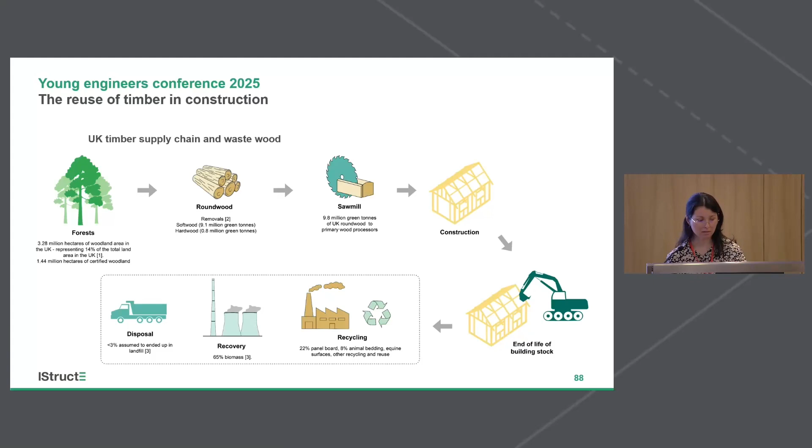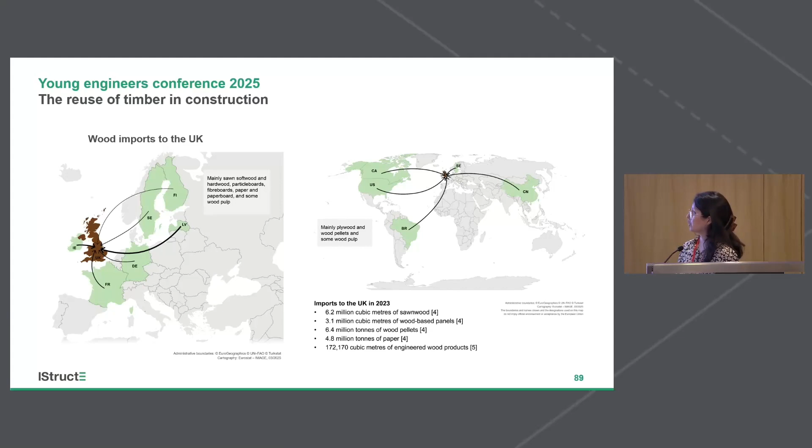So we can see that the UK has a very linear model regarding timber and construction. On top of that, the UK is the second largest importer globally of timber products. We import products from Europe but also globally—all different sorts of products because we don't have much of our own to use.

So here we have the waste hierarchy—the inverted pyramid from the Waste Framework Directive, according to the EU. Similarly to the pyramid we just saw, the first thing we want to do is prevent any demolition, probably. The second is reuse, then recycling, recovery, and disposal.

But the point we wanted to make here before starting the project was basically the fact that recycling can go two ways. We can either recycle something and produce a product with lower value, or we can recycle something to produce a new product that potentially has higher value.

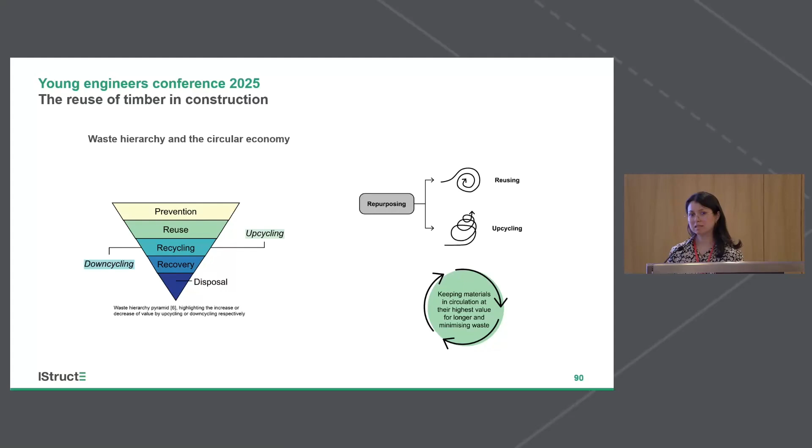By higher value, I mean new products that can potentially replace high energy intensive materials like steel or concrete. So what we wanted to understand in the research was how we can repurpose—either reuse or upcycle—the wood that comes from demolition to keep these wood materials in circulation for as long as possible.

The key objective of this research, what we actually did, was conduct a series of interviews with different stakeholders in the construction sector to understand the barriers and opportunities, to have a clear idea from the demolition side, but also from the construction side—the barriers and opportunities for reclaiming wood on one side, and reusing wood on the other.

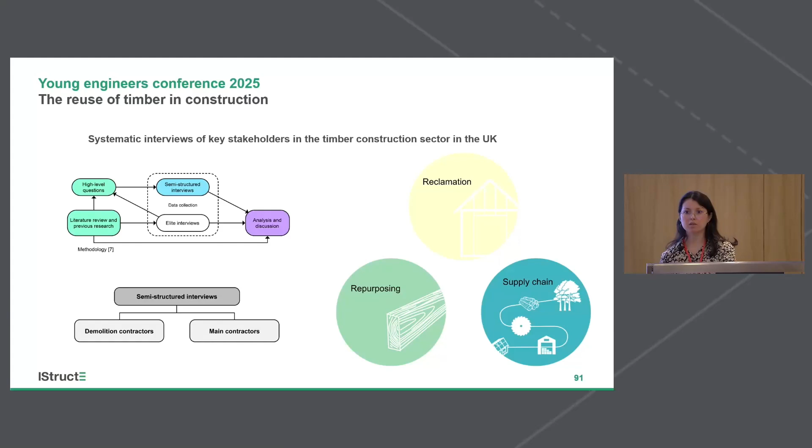In terms of the barriers we got from the responses: the barriers for reclamation are mostly the increase in time for the careful deconstruction of wood from existing buildings. Therefore, also increasing cost, more logistics because they need to find a space to store the material in situ, but also find someone willing to take the material away and pay for it or not.

And then demolition methods and skill set, because they highlighted that different skill sets might be required that are different from those of demolition, like for construction. And safety, for example, of moving materials around the site, especially for tight sites where there's not enough space to stockpile the materials while someone goes and takes them away.

And basically there are uncertainties because we don't know exactly what the value of the material is even before taking it out. In terms of repurposing, the main barrier highlighted by participants was mostly certifications, because there's currently no grading method to grade the reclaimed timber. So everything that has been done has been done using the current standards that are designed for new timber.

And in terms of the supply chains, most of the barriers were related to the lack of demand, because basically nobody's asking for it. There's the fact that it's perceived to be uneconomic at the moment given how the supply chain is, and the security of supply, because we don't know whether we will be able to get all the material we require on time and in the quantities needed.

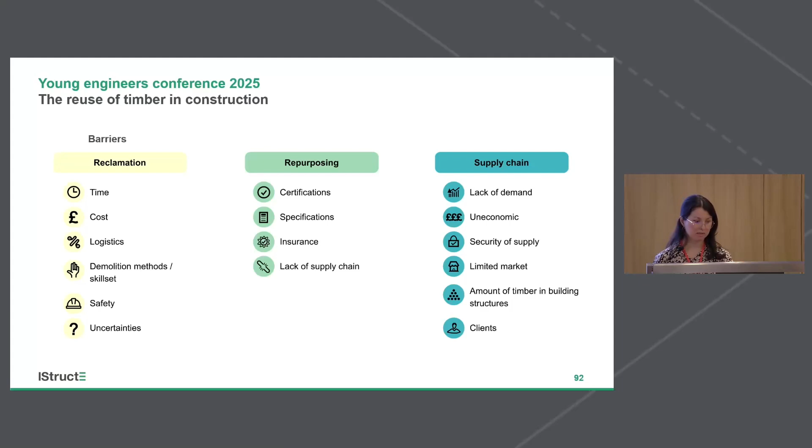There's also a limited market, because some participants saw that the direct reuse, for example of a sawn timber as a joist, is restricted mostly to the private residential sector. And the amount of timber in building structures is uncertain, because we don't know exactly how much is out there to create a viable business model. Clients were also cited as a barrier, but also one of the drivers.

So in terms of opportunities from the reclamation side, we have a series of them. Undertake pre-demolition audits, surveys, and potentially inventories as well, and use the waste wood assessment guidance to understand whether the material is potentially hazardous or not.

But also something that stood out was the fact that tenders are currently mostly weighted towards cost - what's the cost of this demolition? And nobody so far is really taking into consideration carbon, for example, or diverting from recycling rather than only diverting from landfill. Everybody says, oh yes, we're diverting from landfill, but we need to think a little further to see how we can move from only recycling to upcycling or reusing something.

From the repurposing side, one interesting takeaway, apart from the development of new infrastructure and new jobs, was that in contrast to direct reuse, which was mostly perceived as viable only in the private residential sector, the upcycling of waste wood into products such as glulam or CLT - what we're calling mass secondary timber - was seen as something that can potentially be used anywhere, even in the commercial sector, as long as they have the required certification.

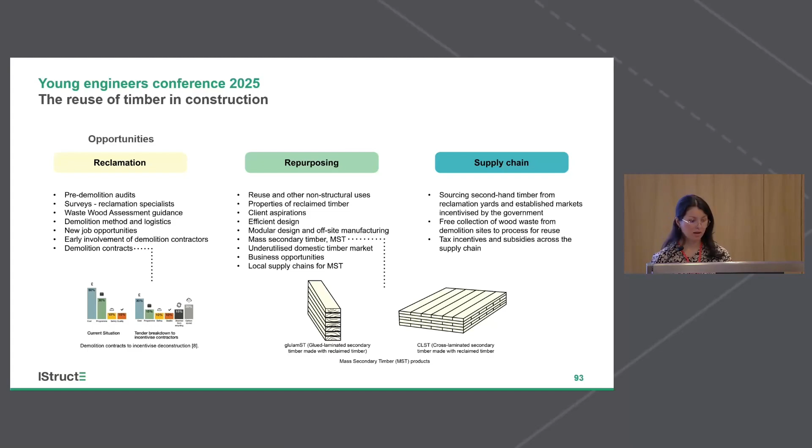So there's potential to exploit here in regards to the supply chain. Based on this information, what are the strategies that we identified from our interviewees?

Firstly, we need to identify the source - are we going to try to source directly from a demolition site, or from reclamation or circular hubs? Then understand the feasibility of doing this by undertaking pre-demolition audits and some testing as well. Understand what the reuse pathways will be, either direct reuse or upcycling, and then based on that, define what testing you will require, plan for careful demolition, and so on.

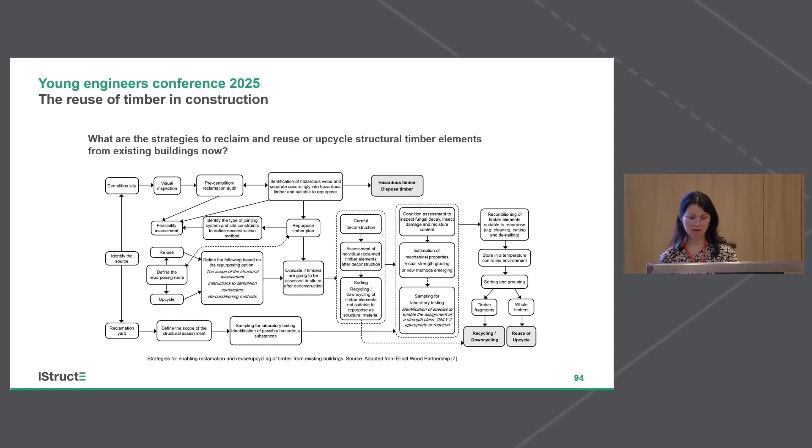So the second project is WOODCIRCLES, which is the one I'm currently working on. This is an EU Horizon project with many collaborators working on it. We, the University of Cambridge, are one of the collaborators. In total we have 19 participants in this project, only 2 universities, because the idea is to make this research very close to the market, since we're looking into developing new value chains.

So new construction products from this waste wood, and the majority of participants are from industry in 3 partner cities where we are aiming to have some demonstrators.

Very generally, this is the WOODCIRCLES concept. We have defined two different concepts: firstly, the urban forest, which is the actual wood material currently in our building stock. We are leading one of the work packages here at the university, where we are mapping the quantities and qualities of these materials in the building stock. The other concept is the urban sawmill.

This is the idea of a new facility capable of turning waste wood into high-value material, or high-value new products that can be used as feedstock for the manufacture of other construction products. One of the main aims of this project is the development of two new value chains: engineered wood products and also insulation products from this waste wood.

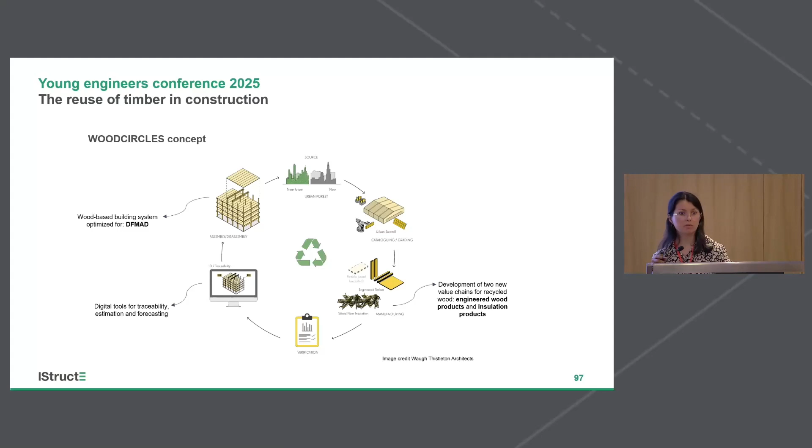So from the waste wood that eventually is going to be reprocessed in this kind of urban sawmill that I just mentioned, something that WOODCIRCLES is considering as well is design for manufacture, assembly, and disassembly, so that once these products are already in the building stock again, we have an easier way to make them go back to reuse directly, rather than the current situation.

So WOODCIRCLES is basically based on three pillars. The first one is regarding the materials, the design for disassembly, and also the digital tools. So we're aiming to...

map how many materials are out there. In terms of quantities, we need to know how much we're expecting to be released from demolitions, and what is the expected quality as well, to know whether it will be reusable or not. It will be useful to have this embedded into digital tools so it can help us make decisions.

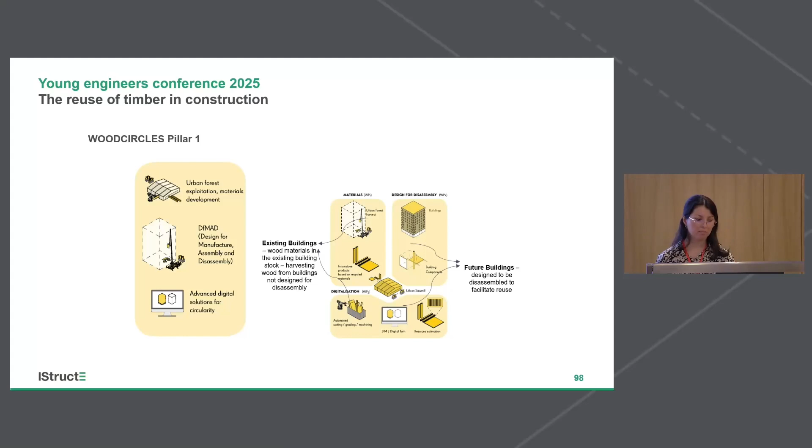Another step will be the design for disassembly, which is led by Waugh Thistleton Architects. And the last one is in terms of the urban sawmill, that this development is driven by Robot Lab from the University of Amsterdam, which is working together with Trimble to develop these digital tools.

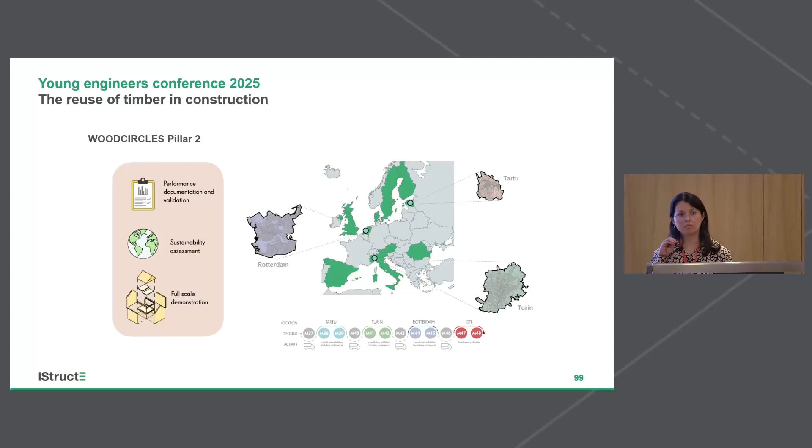Pillar number 2 is regarding the certification, the testing, and the sustainability assessment like LCA, LCC, and the social aspect, to understand whether everything actually makes sense environmentally as well. And full-scale demonstrators, because we will fabricate some products from this waste wood, and create one demonstrator that will travel from the three partner cities that we have: Tartu, Turin, and Rotterdam.

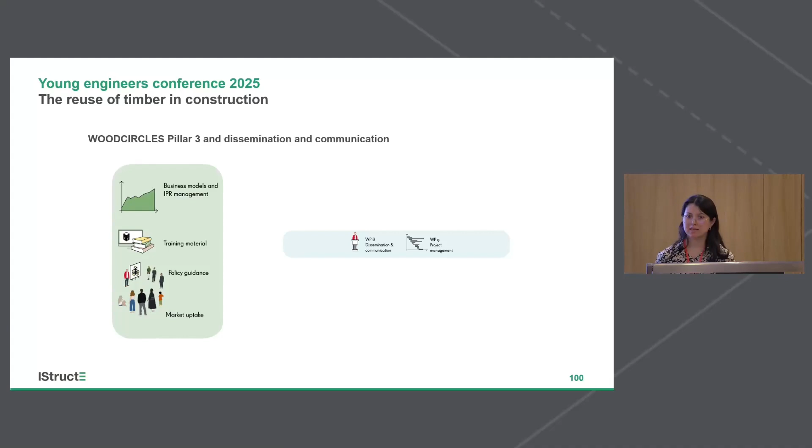Finally, we'll have a work package that is working on the business model, to understand the viability of doing this in an ideal kind of value chain or supply chain. And also training material, policy guidance, and market uptake, and of course the dissemination and communication.

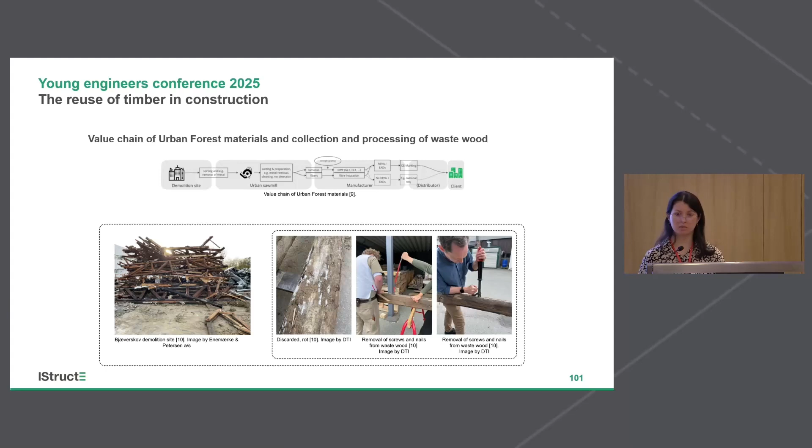So we're working on developing an analysis: material flow analysis, and also a stock analysis. The stock analysis is focused on the partner cities, so we're basically collecting data at city level, building level, and component level to understand what the actual building stock is there.

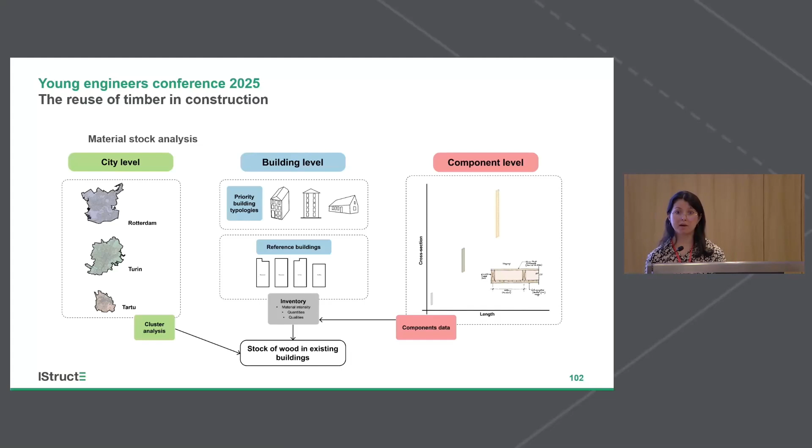To calculate the material intensity based on different building typologies identified from the three partner cities, and together with the data at city level of the buildings of each municipality, to calculate in terms of basically volume or weight, but also the expected quality.

And finally, what are we doing with this data? The material stock is going to inform the material flow analysis, because this is going to include everything that comes into the system, how much we are using, how much we are disposing, and what ends up staying in the system as a stock, basically our building stock. That's for the analysis to understand how everything is flowing.

But we are also linking this to one of the tools that Trimble is developing, Locus, so that we can actually visualize where our materials are, to understand geographically, okay, we have most of the materials we're expecting to be released in the future around these areas, so probably urban sawmills, or the ones that have been developed, it makes sense to be developed in these areas and so on.

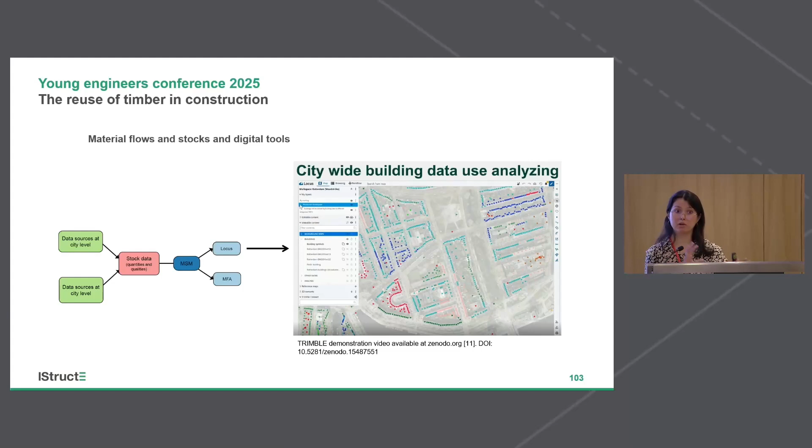So that's all from me.